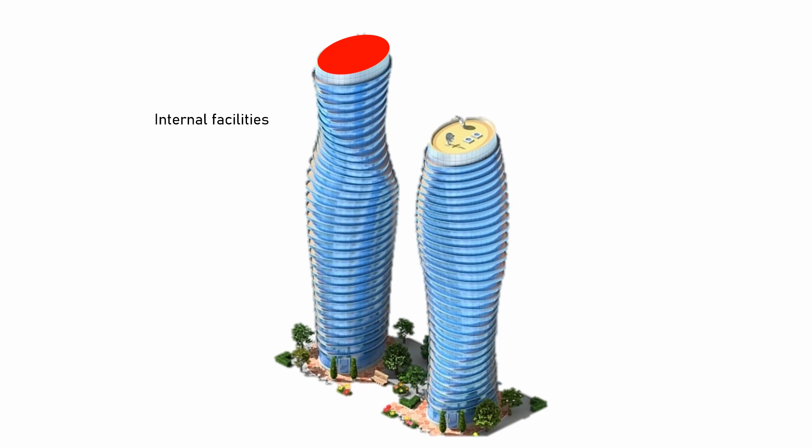Before starting our presentation, let me remind you of our last week's presentation briefly. First, we presented the internal facilities of the Absolute World Towers. In detail, we informed you of the space arrangement of one sample floor and how the architects divided the internal facilities.

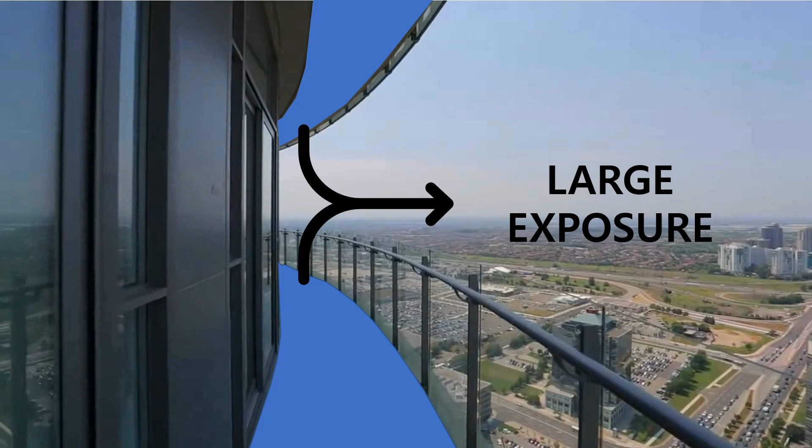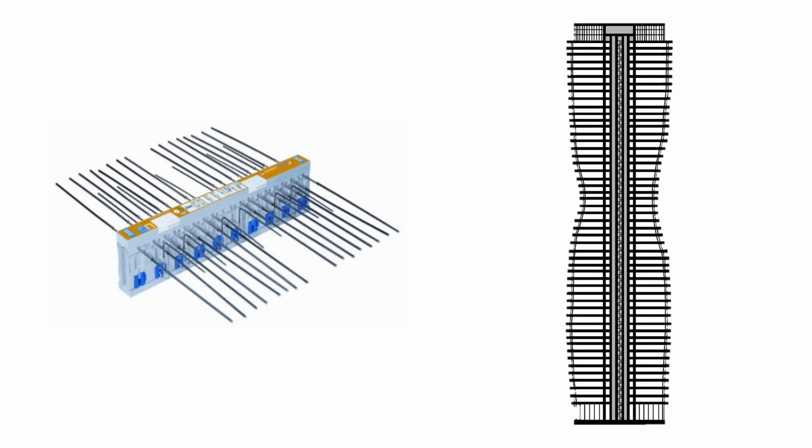Secondly, there was a significant problem regarding the insulation due to the balconies. Thus, we introduced two solutions to the heat transfer problem: the installation of thermal breaks and the internal bulkhead with external insulated soffit.

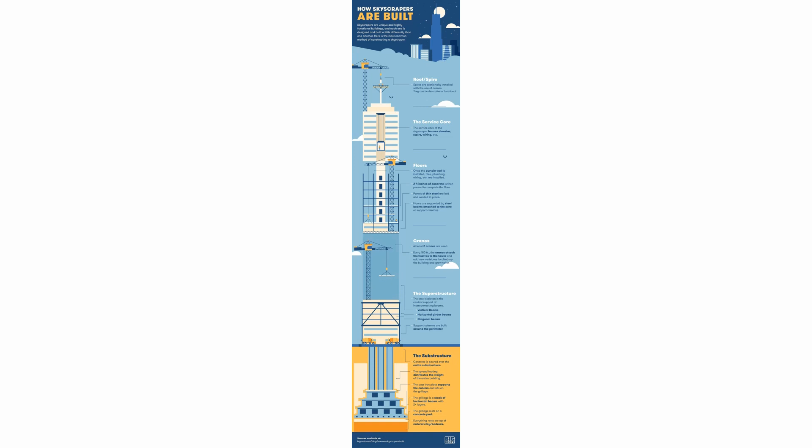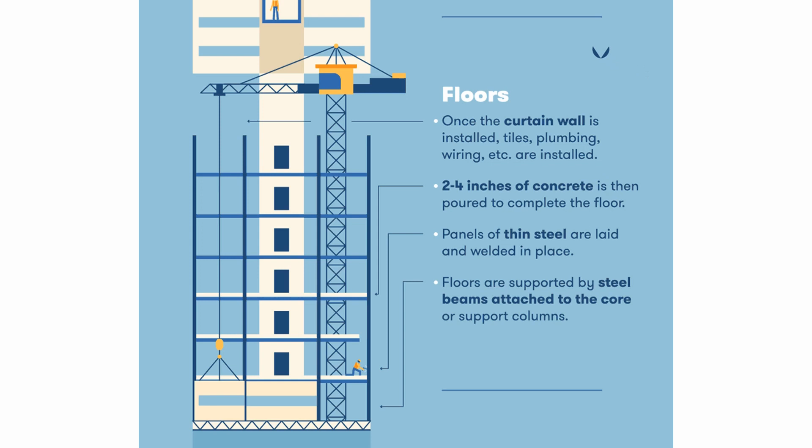Starting this week, we are going to introduce the actual construction methods in detail one by one. What our team was most concerned about was: what is the biggest feature of this building, and what is the proper way to build it? After this process of thinking, we were able to discover the distinctive features of Absolute World that require a characteristic construction method.

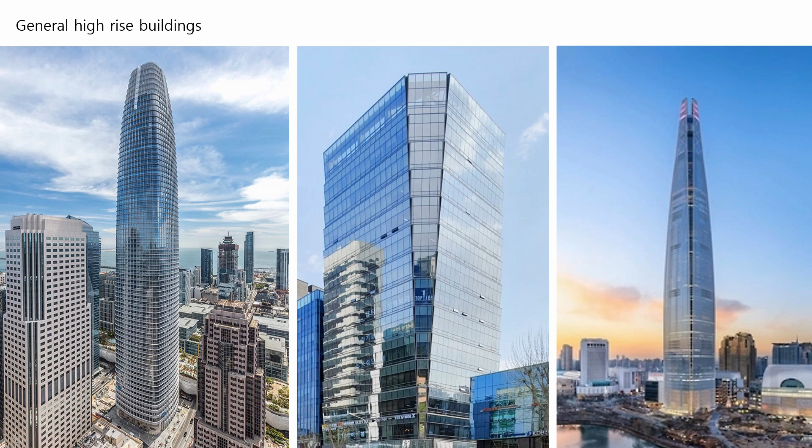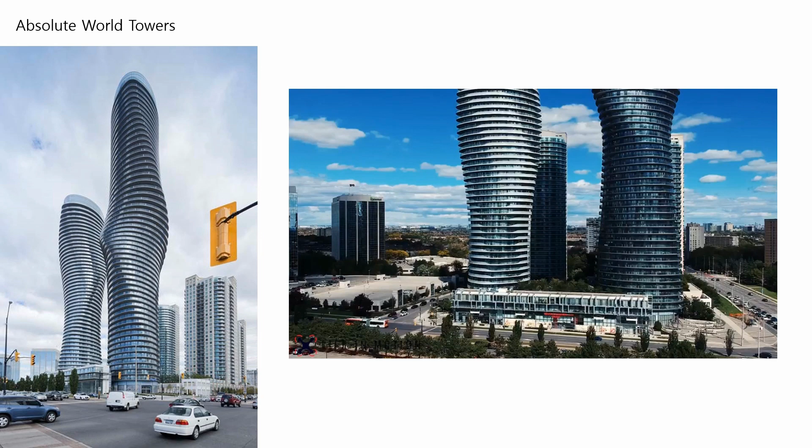Generally, the appearance of buildings is determined by the shape of walls and the building materials through curtain wall construction. However, unlike other buildings, the shape and arrangement of the slab determine the appearance of the Absolute World Towers. This was the biggest distinction from other buildings.

Designers wanted to provide residents with a human and natural life by placing balconies on the outermost side of the building rather than simply placing walls. In addition, by using an elliptical slab, it was intended to induce the naturalness of curves.

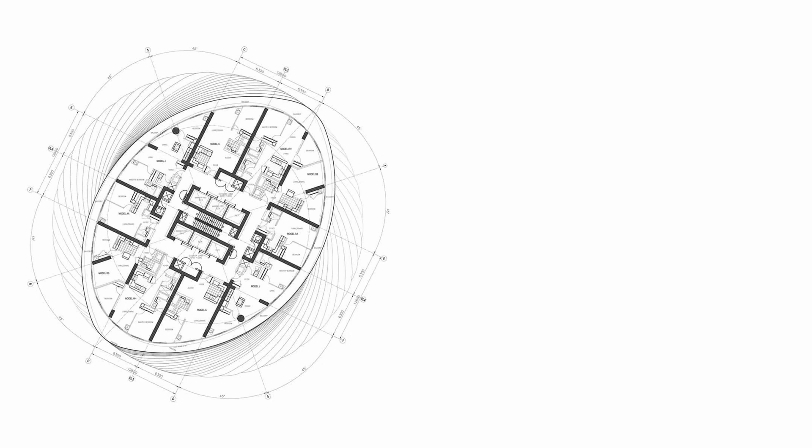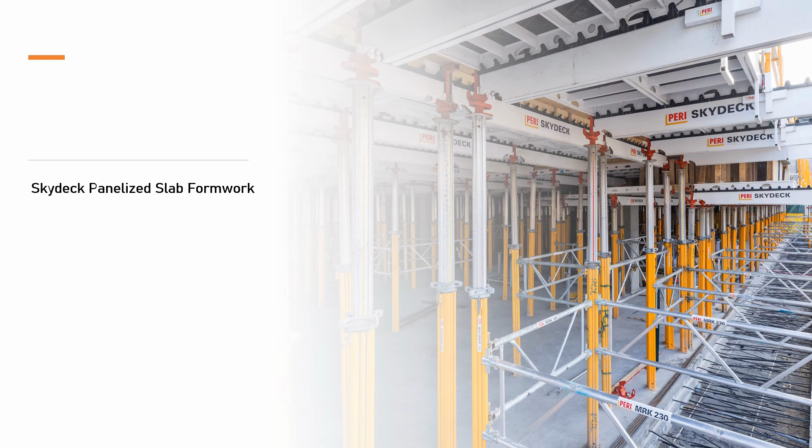The most conspicuous thing that structural engineers had to keep an eye on was the elliptical slab, so they went through deep concern and eventually adopted the Skydeck forming system. So today we are going to take a closer look at the Skydeck formwork.

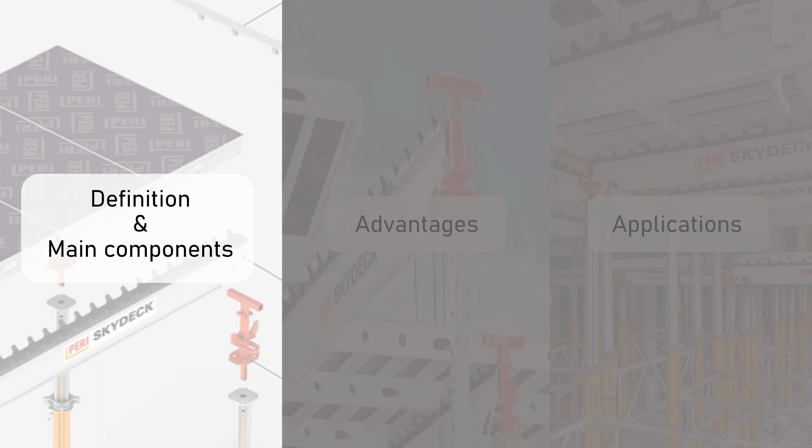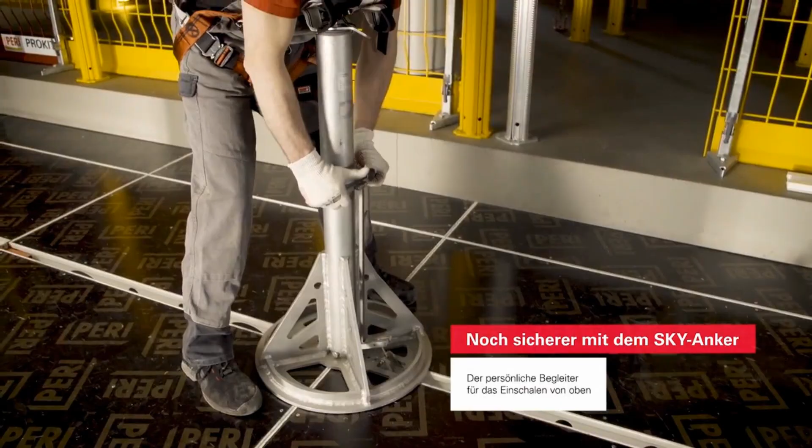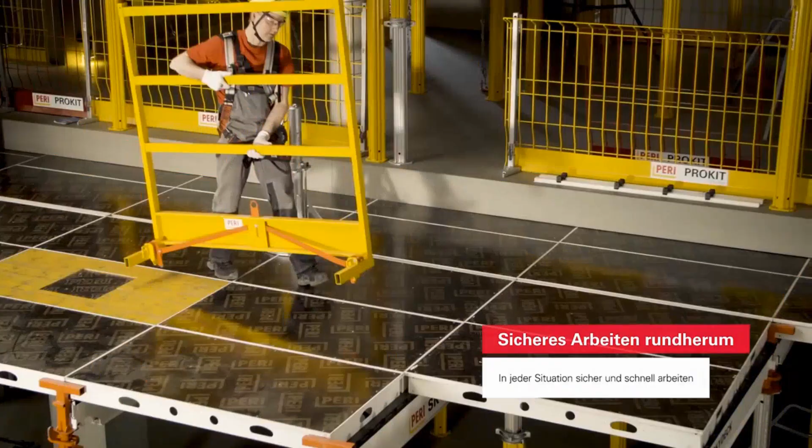I'm going to tell you the definition and main components of the Skydeck formwork first. What is Skydeck? To put it simply, Skydeck is a type of panelized slab forming system. As you know, the forming system is temporarily installed to make a concrete structure into a prescribed shape and dimension.

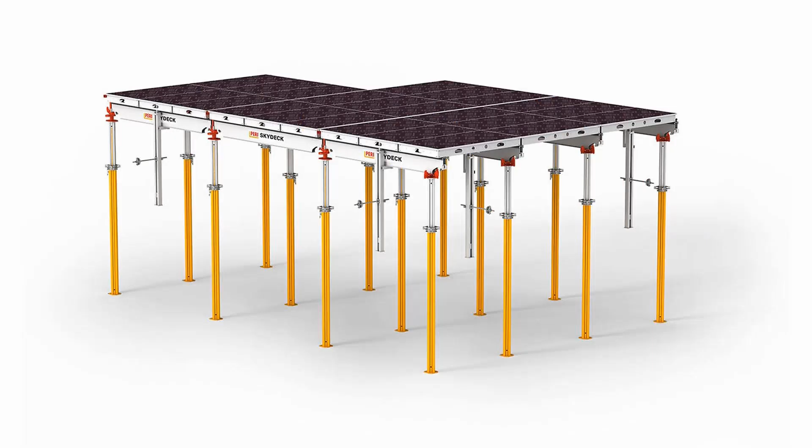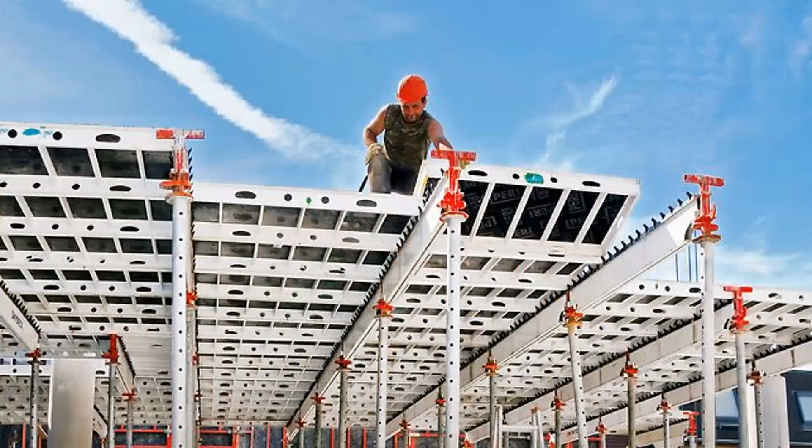The selection of the slab forming system was very important in this building, where the slab is the key point. The biggest factor that allowed Skydeck to be selected was probably that it was safe, easy, and fast to install. Skydeck panelized slab formwork was used for constructing the floor slabs of the office tower, which could be easily adapted to suit the elliptical shape using standard components.

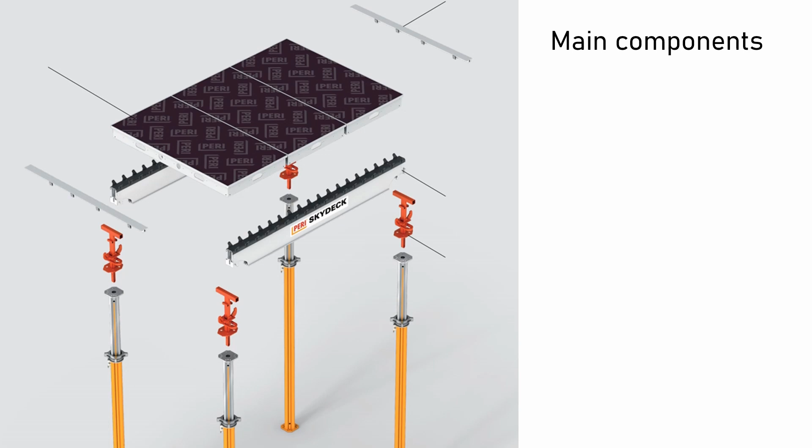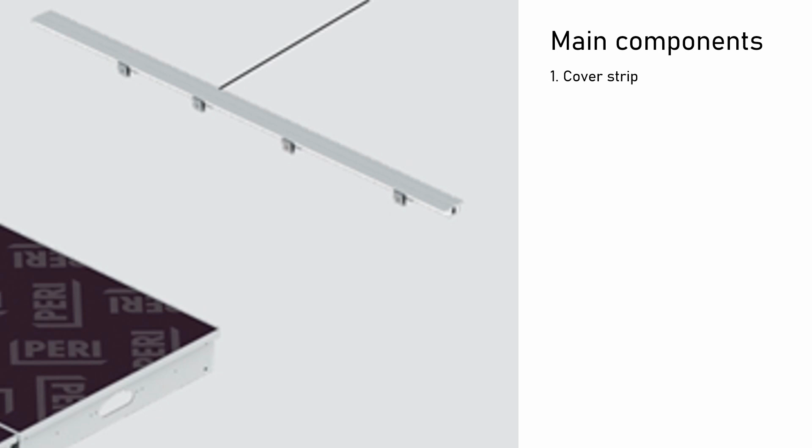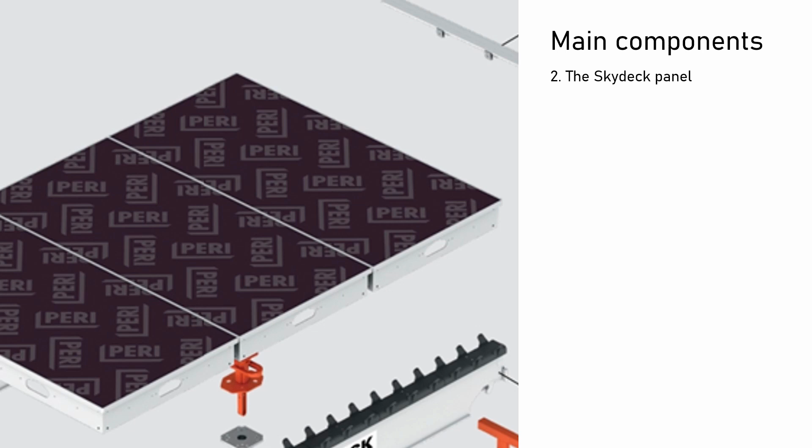Then, what are the four standard components used in the Skydeck formwork? First, the cover strip is used with the drop head system and made of plastic. The second component is the Skydeck panel: a lightweight aluminum frame covered with 9 millimeter thick form lining.

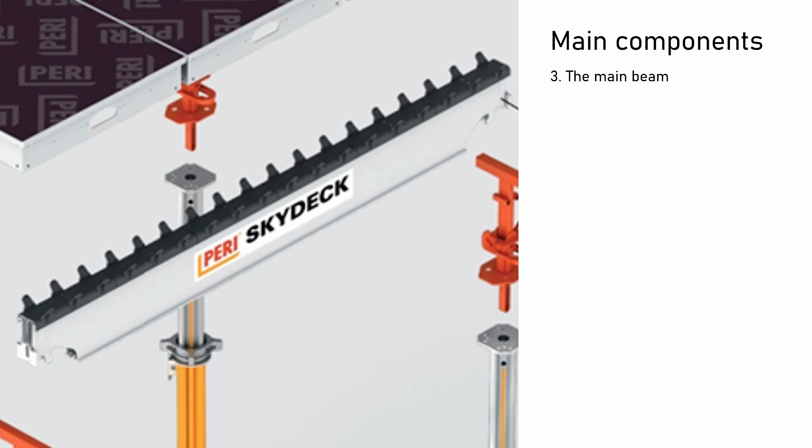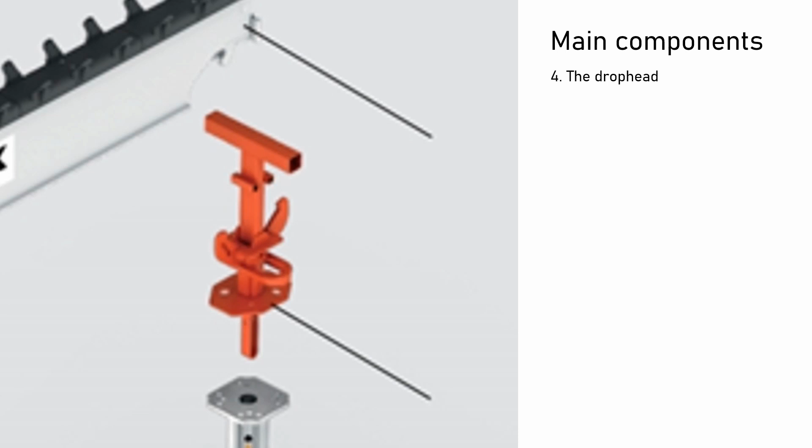The main beam is standardly 2.25 meters long, and it provides support for 3 panels, each with a width of 75 centimeters. Lastly, the drophead accommodates the main beam and is covered by the cover strip. The drophead can be lowered by 6 centimeters and allows early striking to take place.

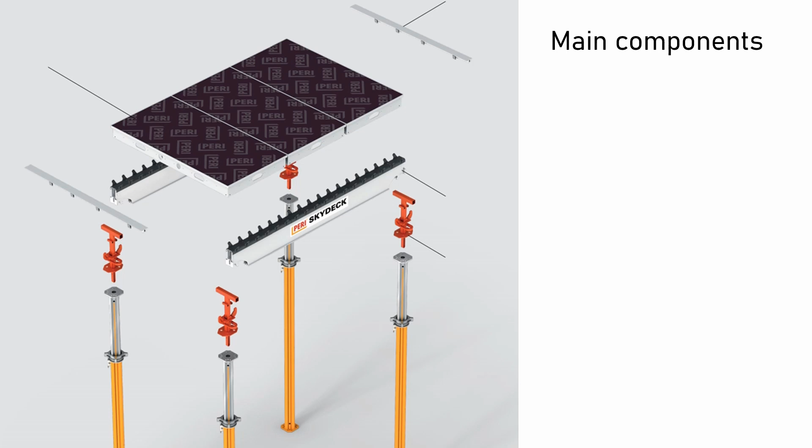We have looked at the 4 simple components of Skydeck. From now on, let's figure out what might be the biggest advantage of Skydeck. There are so many advantages, but today I will introduce the 3 strengths that most fit the Absolute World Towers.

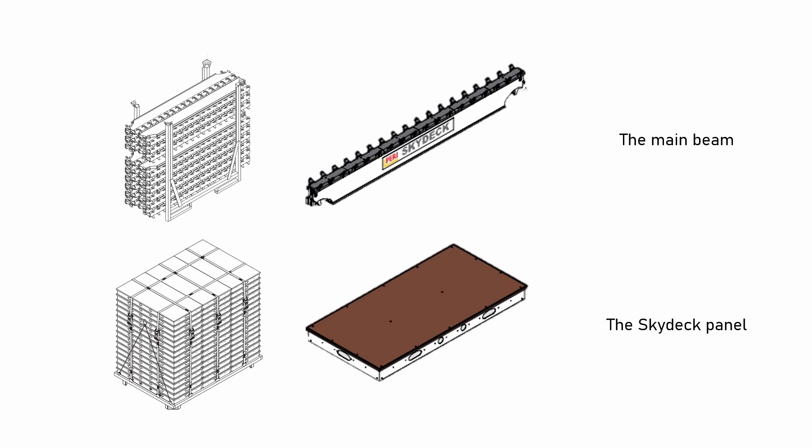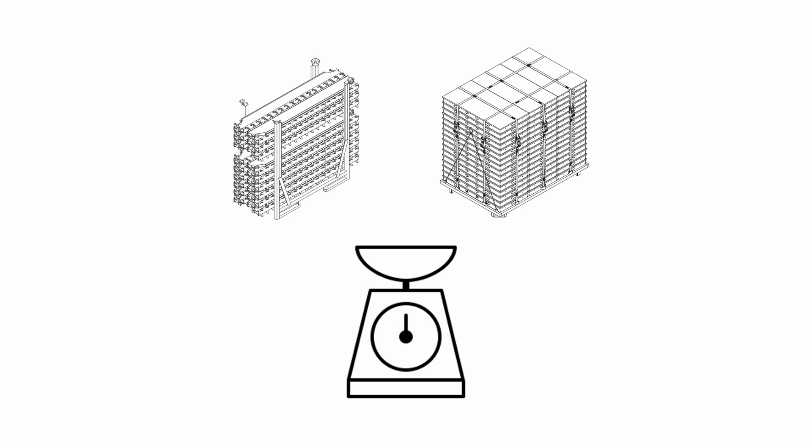The first one is that Skydeck formwork doesn't require much effort. These are the 2 components, the main beam and the Skydeck panel. The panels and main beams are made of aluminum, which is very light. The maximum weight of the panel or main beam is less than 16 kilograms. Because of the use of light and easy-to-handle components, the Skydeck formwork requires effortless working.

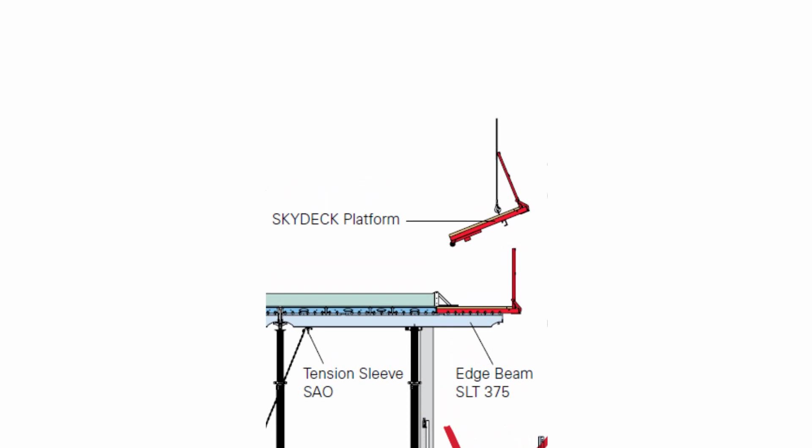The second advantage is that it has a high level of safety. The foldable platform has been designed for a load of 150 kilograms per square meter, and the edge beam serves as a support for the platform. The cantilevered beam is secured and tensioned by means of a chain. Especially, this cantilevered beam is specialized in Absolute World Towers.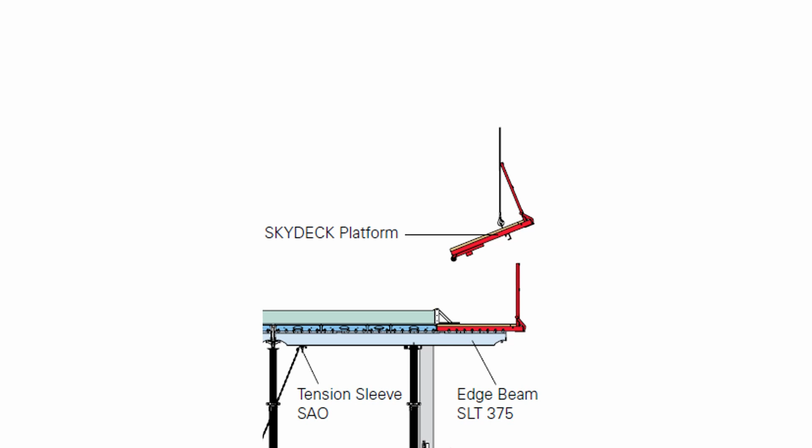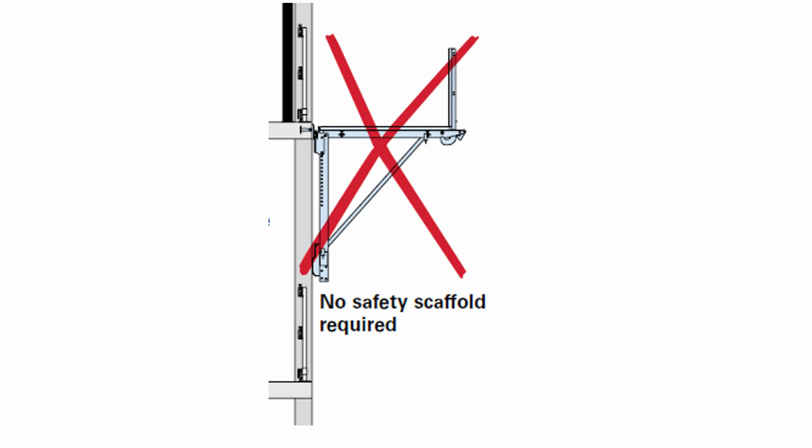Also, at the edge of the building, the use of the Skydeck platform means no safety scaffold is required in the story below. During concreting operations, the Skydeck main beam lies protected under the Skydeck panels. This point illustrates the high safety characteristic of Skydeck in particular.

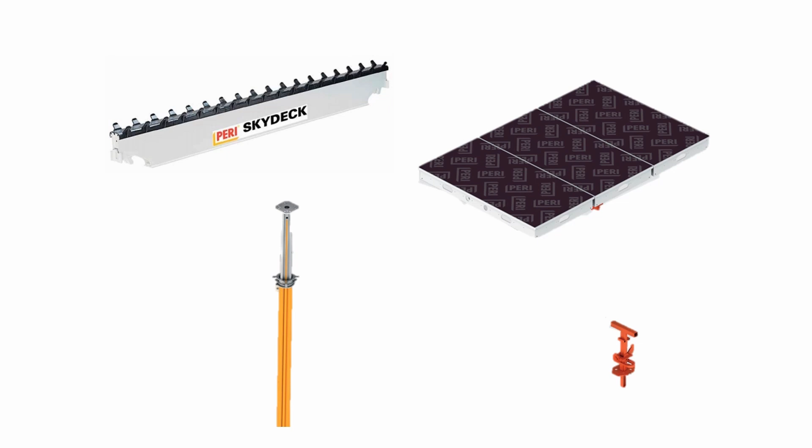The third advantage is easy cleaning. The Skydeck slab formwork system has been designed in all respects to ensure that only a minimum of cleaning effort is required.

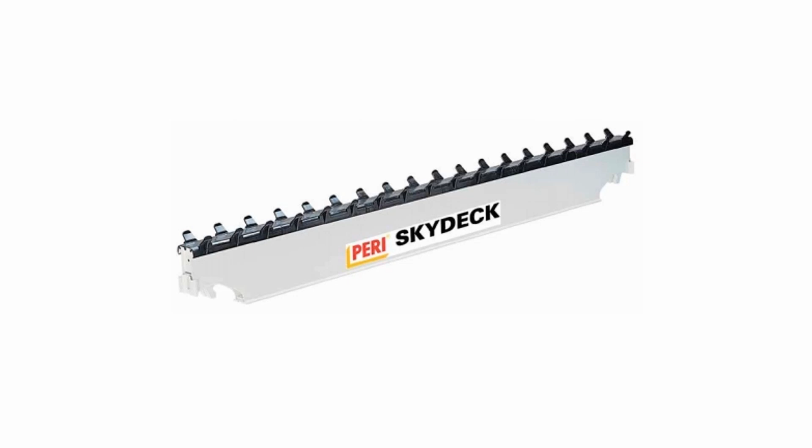In the case of the main beam, it is powder coated and the rack is made of plastic. This prevents adhesion of the concrete and minimizes cleaning requirements. Skydeck panels and main beams have self-draining edges as well as undercut panel edges. As a result, the side areas of the panels remain significantly cleaner than in other systems.

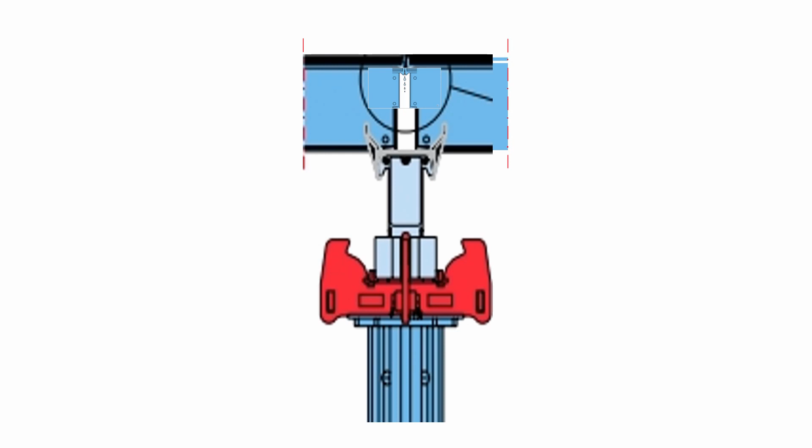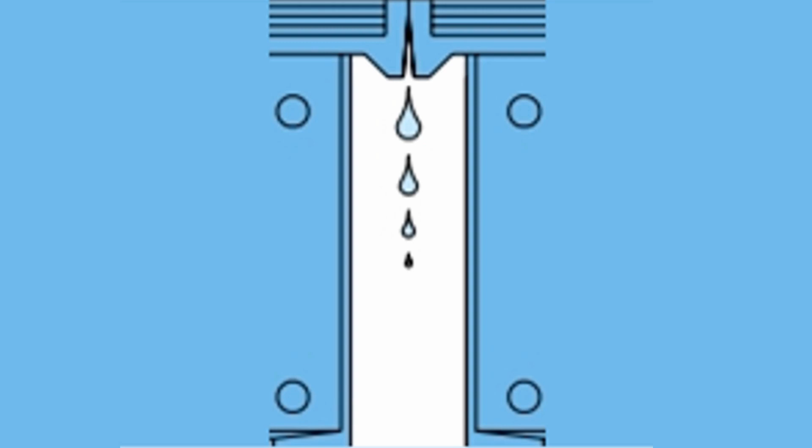This shows the detailed description of the self-draining edges, which guarantees only a minimum of soiling on the side areas of the panels. These were the 3 major advantages of Skydeck.

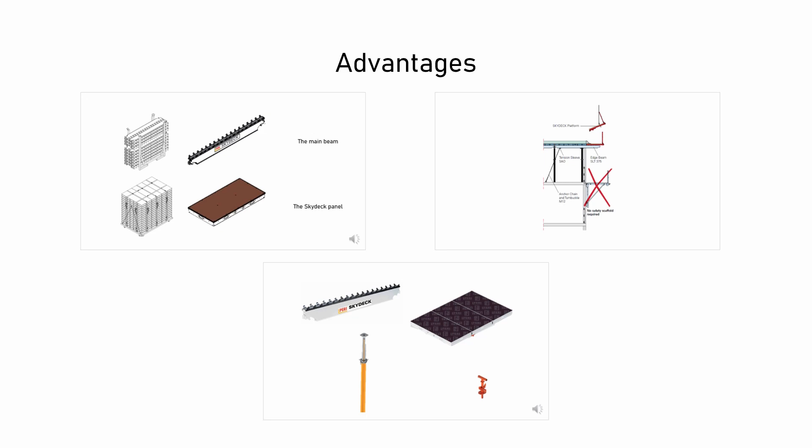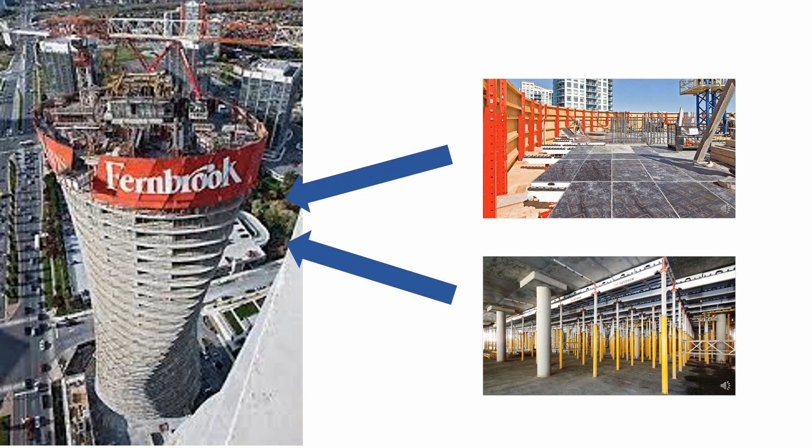The last part is the applications of Skydeck. Skydeck's range of applications extends from residential construction to industrial construction projects with thicker slabs. With an extensive range of accessories, the slab formwork is ideally suited for markets with very high safety standards. The systematic assembly sequence and lightweight system components accelerate working operations.

Next week, we will investigate other construction methods and devices associated with slab and wall. We are planning to conduct research on jack support and RCS form next week.